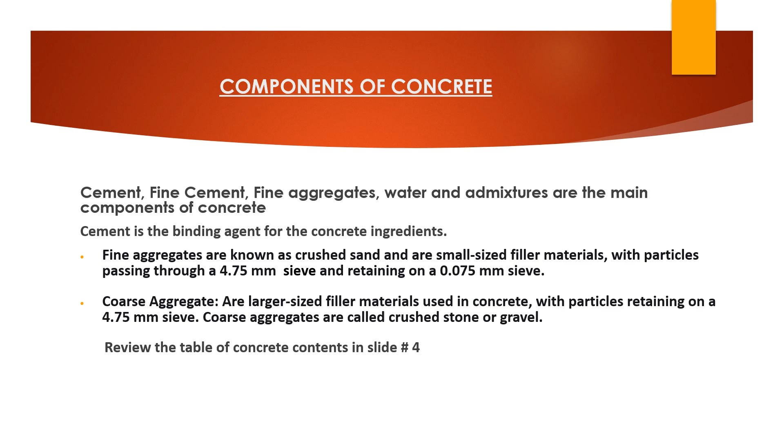Thank you. In slide number 4, we will review the table of scope of works, definitions, sizes of particles, materials, shapes, textures, function in concrete, and finally the use of fine and coarse aggregate in concrete. This table is very important, so please review the same.

Thank you. In slide number 5, we will discuss concrete vibration, meaning that we have to compact the concrete.

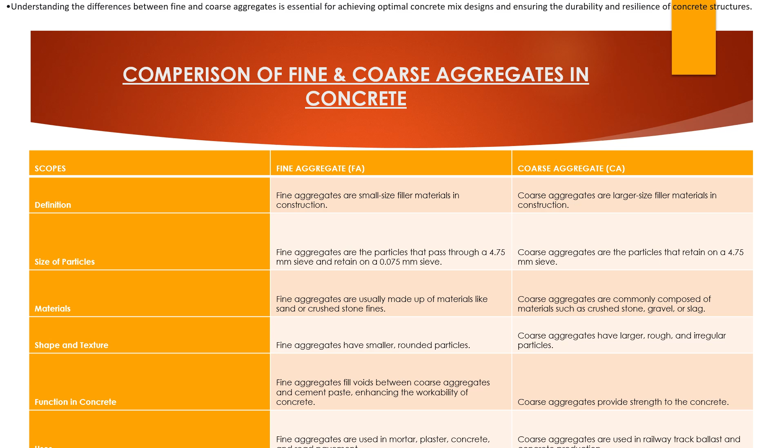Thank you. Number 6, we will discuss about the benefits of revibration of concrete. There are some repetitions in my video, because I want to repeat every time so that you can understand the topic very well.

Eliminating air pockets is one of the qualities of revibrating. Voids that may form during the initial pouring are addressed, ensuring better compaction and density. Revibration decreases the porosity and the concrete gets better shape.

Revibration gives a smoother surface, reducing the need of extensive rework, improving the finishing of the concrete.

Revibration minimizes air pockets and can help reduce cracking during curing. Overall, the improved density and strength lead to a more durable concrete structure that can withstand the worst environmental conditions. So all these qualities are there of revibration of concrete.

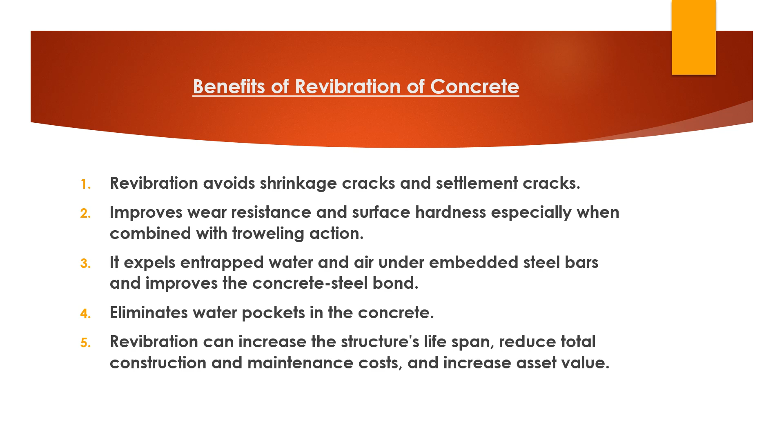Slide number 7, we are going to discuss the consequences of non-vibrating of concrete.

Unvibrated concrete can have significant air pockets, leading to weak spots, and potential structural failure may happen, reducing the overall compressive strength and tensile strength of the concrete, which may compromise the quality and affect the integrity of the structure.

Segregation may happen without vibrating the concrete. The components of the concrete can segregate, which can give honeycombing or bad shape to the concrete.

Poor surface: when we are not vibrating, we will get a rough and uneven surface, and the components of the concrete are not mixed properly.

So all these effects and consequences affect the concrete if we are not vibrating it.

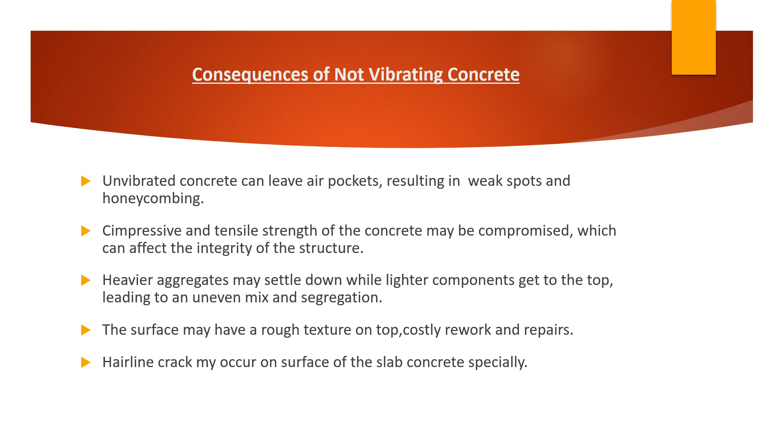Now we'll discuss the process of manufacturing concrete. This is slide number 8. There are different procedures of manufacturing concrete. We will discuss a few of them.

Number one is material batching, or measurement by volume or by weight. Number two is mixing the concrete. Number three, how to transport the concrete. Number four is pouring in formworks, which means in shutterings. And finally, we have earlier also discussed the compaction, meaning we have to discuss the vibration of the concrete.

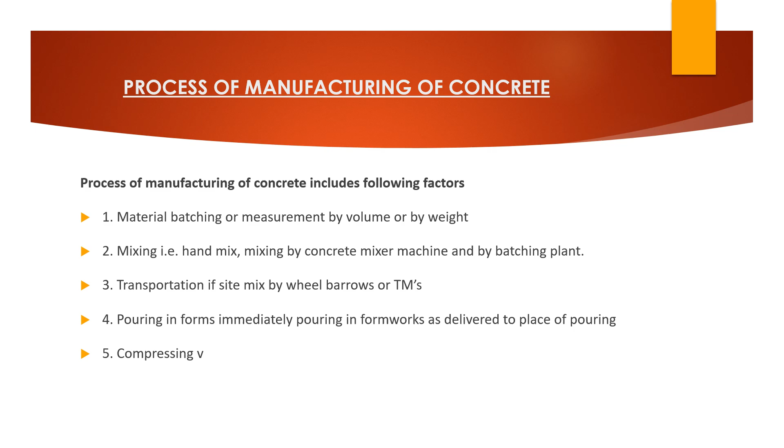These small points we will discuss in a bit of detail. Engineers, very quickly we will discuss the points we highlighted in slide number 8.

Material batching: batching concrete in batching plants. In this process, the components of the concrete are either measured by volume or by weight. Mixing by mechanical mixer machines is done by volumetric measurements, and one bag of cement is equal to one box area.

Mixing of the concrete can be done by hand, by mechanical mixer, or by batching plant, but we have to take care that all methods are done in a homogeneous way, so the consistency of the concrete remains.

Transportation of the concrete should be done to the working place as soon as possible before the setting time of the cement. Then pouring the concrete in formwork.

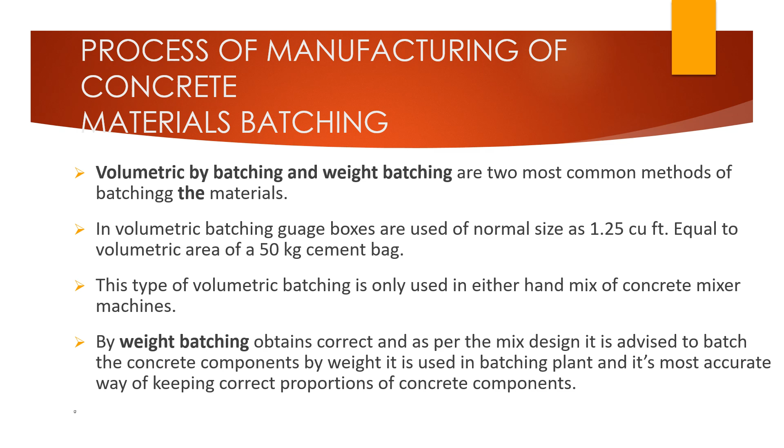The concrete, when it is ready to pour, must be transported and poured in formworks as early and as safely as possible. So all these precautions are to be taken for pouring of the concrete.

Slide number 10, we are going to discuss curing. Concrete curing is the process of maintaining adequate moisture in concrete within a proper temperature range in order to support the cement hydration at early stages and early ages.

Hydration is the chemical reaction between the cement and water when these are added together. This results in the formation of various chemicals that contribute to the setting and hardening of the concrete. So curing is the most crucial item, and we have to do the curing as per the nature of the concrete.

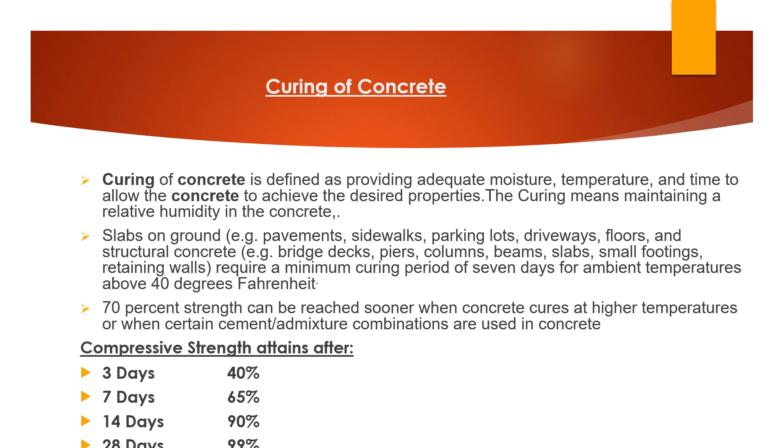In slide number 11, we'll discuss drying of concrete. Concrete dries as the water inside evaporates through its surface. Concrete dries within 24 to 48 hours and one can be able to walk on it.

For concrete to dry and reach its full strength takes about 28 days. The curing process is usually completed after 28 days; however, the concrete will continue to harden for a significant amount of time, taking days and months, depending on the environmental conditions of the location.

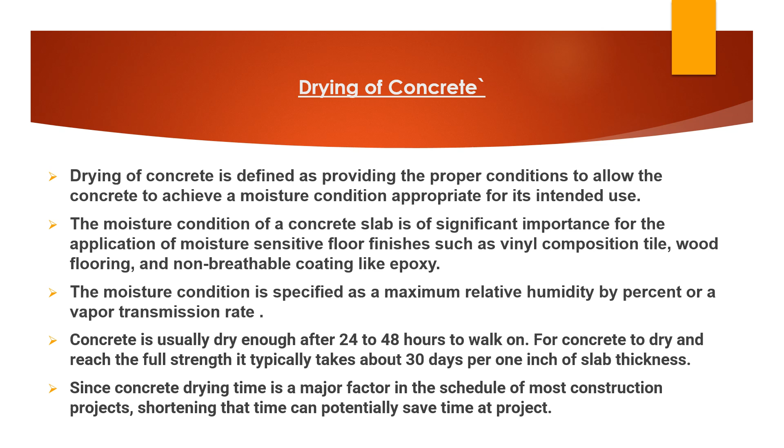Even if the concrete is cured, excess water still must evaporate from the concrete. While it only takes 28 days to cure the concrete, drying can take months and months. So we have to conclude this topic, and we will go through it again in part 3.

Thank you very much, dear engineers. This is slide number 12, the last slide: the end of part 2 of the lecture on concrete technology. Part 3 on the same topic will be uploaded soon.